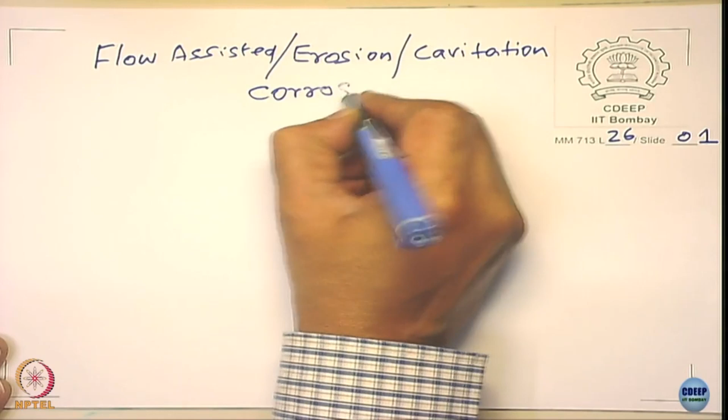Now as I told you, there can be a relative movement of environment. Please notice that when you say the environment, we talk about not a benign one, it is a corrosive environment.

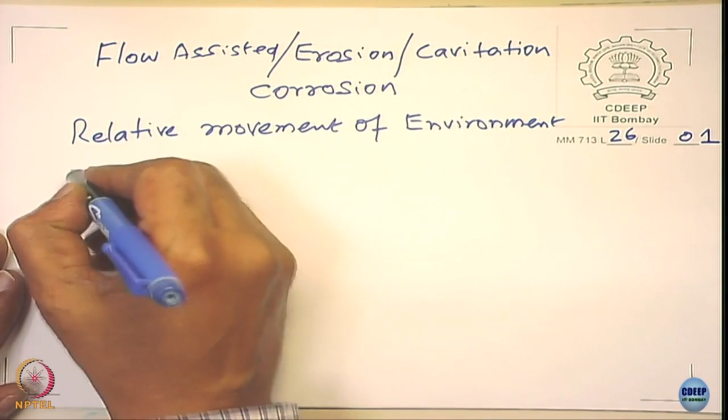Now let us try to understand what you mean by relative movement first of all. The structures can be static, what happens is the environment moves, I would say.

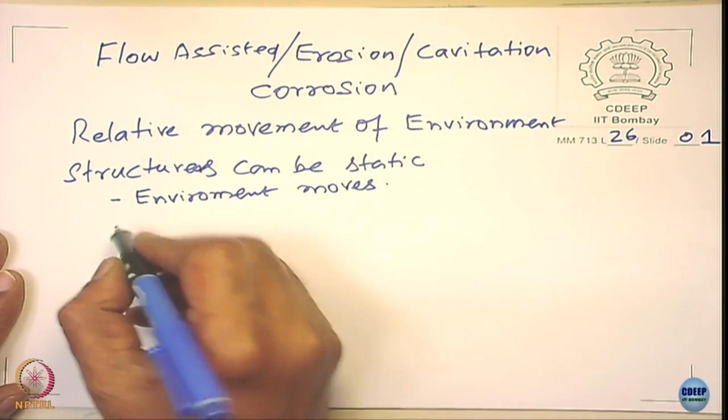An example is a pipeline carrying water, carrying various types of chemicals. Another example could be heat exchangers. The structure is static, the environment moves, maybe at different velocity, different pressure, temperature - all this can happen.

The structure moves. Can you give an example? Anybody? You can say ship, but the velocity is not okay. You can say ship. You can talk about an aircraft also, spacecraft. Sure. In fact, the aircraft moves at a very high speed.

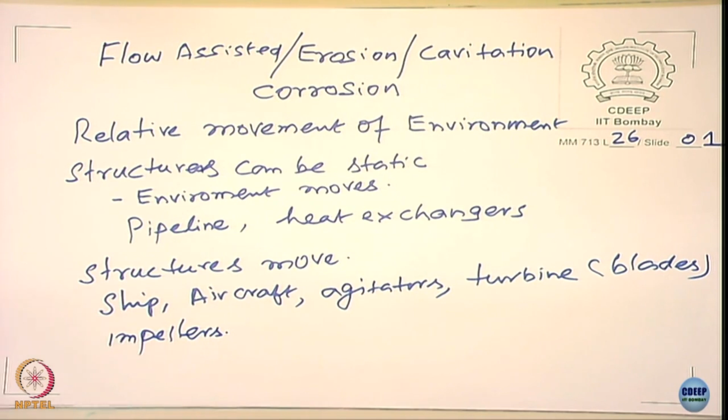Other examples, industrially, agitators, right? In a turbine, right? A turbine, the blades. It could be a gas turbine or it could be a hydraulic turbine, a gas engine. Anything else? Impellers, they move. Propellers, they move. So these are about the two types of structures I would like to say.

Now, let us look at the environment. What is meant by the environment here? Of course, we will talk about the fluids. At least one has to be a fluid. I mean, corrosive environment is a fluid.

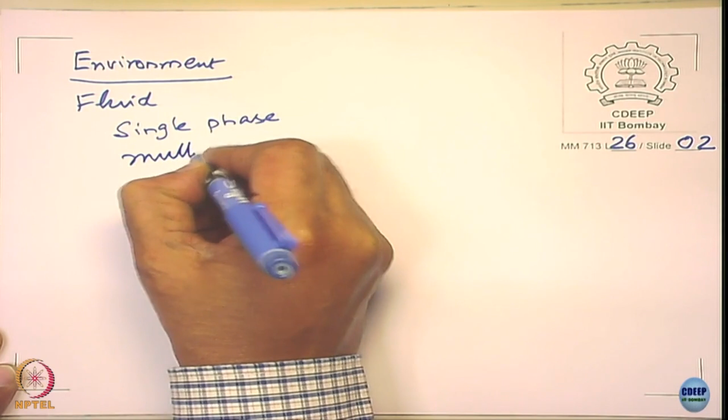It could be a single phase or it could be multi-phase. Generally, two phases can happen commonly, right? Let us say simply water, sea water. An example, this is sea water plus some sand, right?

This can happen. In a thermal power plant, for example, you talk about the steam generators, you may have a gas, steam, you may have water. In a gas turbine, there can be corrosive gases, there can be particles.

So when you say fluid, it is not necessarily a liquid, okay. It can be corrosive gases, it can be liquid, but the solid is not necessarily corrosive. In most cases, you do not even consider them as corrosive. Their role is to give an impact. We will see this later, how they can really affect the corrosion of structures.

If you look at the fluid conditions, when the fluid moves, how the corrosion rate of the metallic structure can change with respect to the velocity. We have seen somewhere, right, the role of velocity on corrosion rate. We have seen this before.

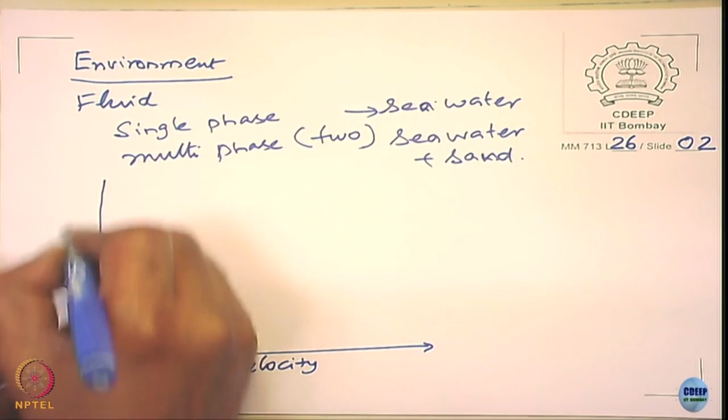Can anybody recollect? Yeah, we talk about concentration polarization, right? When there is a concentration polarization, when you increase the velocity, the corrosion rate increases. It is simply a diffusion control process actually there. If there is no diffusion control process, the velocity does not play any significant role.

You can go back and see the first part of the course on thermodynamics and kinetics of electrochemical corrosion. If you plot this, something like that, the corrosion rate initially increases gradually like that, a steep increase in corrosion, then again it slopes off like this.

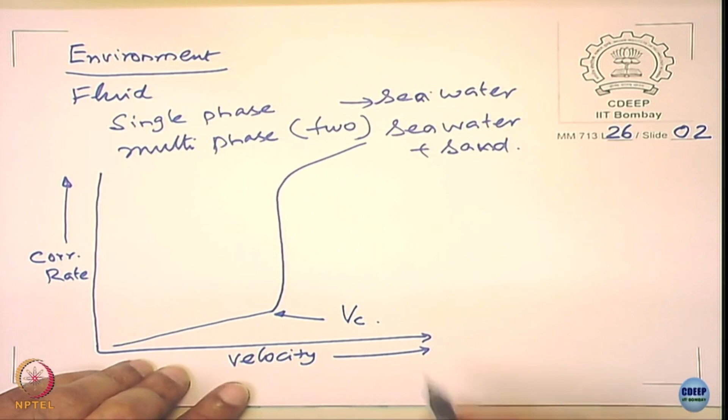That is, you see here there is a velocity called a critical velocity, above which the rate of corrosion steeply increases with velocity, right.

When you visualize, let us say a pipeline, suppose visualize it, and if the fluid travels in the pipeline, if the movement of the fluid is parallel to the surface, what do you call that? We call a laminar flow.

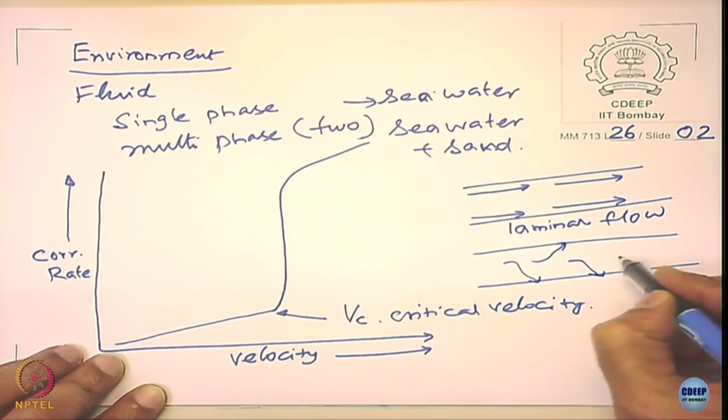If the flow rate is increased, what happens now? It is no more parallel to the surface, it is going to hit the surface. Okay, what do you call this?

Now the laminar flow, turbulent flow, they all depend - this is described by Reynolds number and there are equations we will not get into here. But it is enough to understand that the nature of flow decides the kind of corrosion that can happen. Laminar flow or turbulent flow depends on velocity, density, the dimensions of the pipeline, and so many other factors.

So the rate and nature of corrosion here is different from there. You can divide this - this is going to be turbulent, and this is going to be laminar.

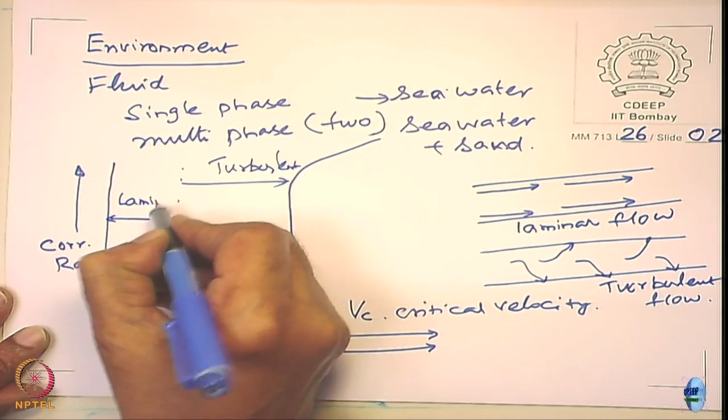And for a major part of the laminar flow, we can say that the corrosion rate can be controlled by diffusion processes - essentially corrosion is diffusion controlled. Some of you would have studied this, if you can recollect - if it is a cathodic reaction, it is diffusion control.

This is called IL, and as the velocity increases - we talked about this in the first part of the class - it is a diffusion control process, and the corrosion can be assisted, and the mass transport is important. You will see later how the corrosion can get affected.

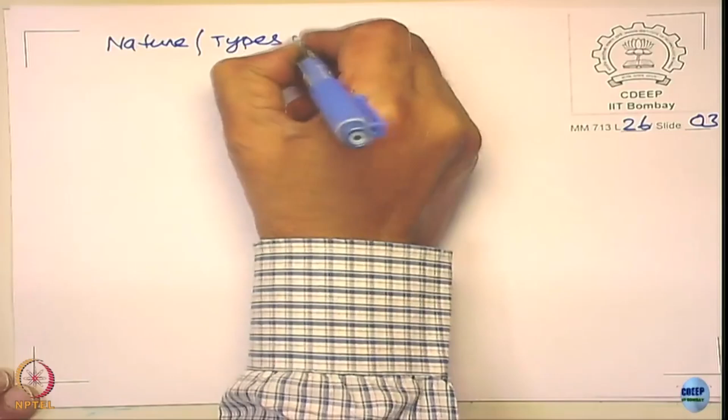Now, depending upon the kind of flow conditions that exist in a pipeline, the types of corrosion can be broadly classified into 3 types. I call these the types of corrosion which are induced by the flow.

One is called flow induced corrosion. This is essentially related to an increase in mass transfer - mass transfer of the corrosion product, how quickly it can get removed from the surface.

Earlier we talked about the diffusion control process - in that case, what is diffusion controlled there? If you remember, when we said here, what was the mass transfer control? It is the cathodic species that is mass transfer control. We will see here that in this case it is not necessarily the cathodic, reduction species that is mass transfer control - it is the oxidized species which are mass transfer control.

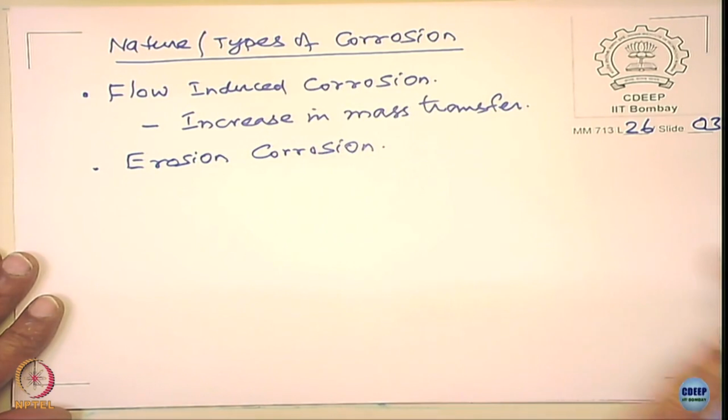I will just talk about that soon. Next is erosion corrosion. Here it is mechanical damage, mostly of surface films.

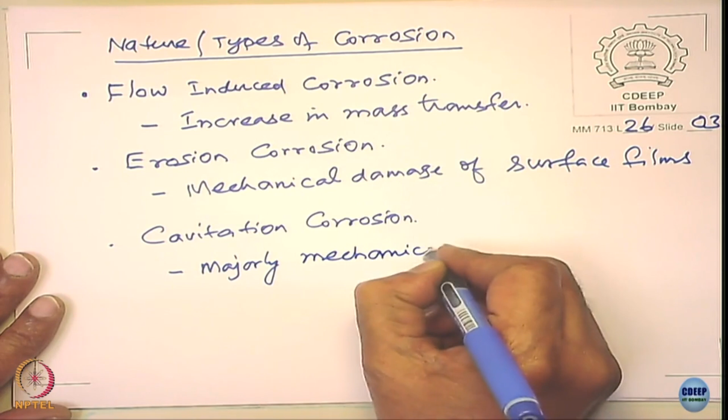So there is an impact, there is real erosion taking place, in the sense of a mechanical factor. The other one is cavitation corrosion - it is majorly mechanical, and corrosion, if I can say, is minor, in quotes.

Now we have classified the corrosion occurring on a metal into 3 different categories, primarily because the mechanism of corrosion in all these cases is different. When the mechanisms are different, the solutions are going to be different, so we are not going to apply the same solution in all cases. Of course there can be an overlap of properties and protective measures, but distinctly they are different, you can see that.

So now let us look at the first type, the flow assisted corrosion - flow induced or flow assisted, you can call it either way. What is this flow induced or flow assisted corrosion? What does it do?

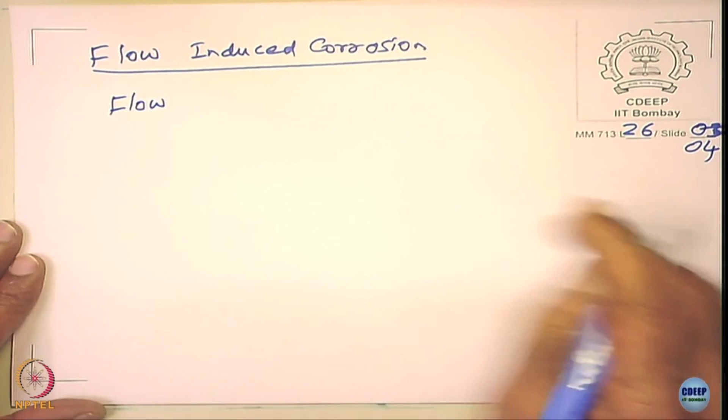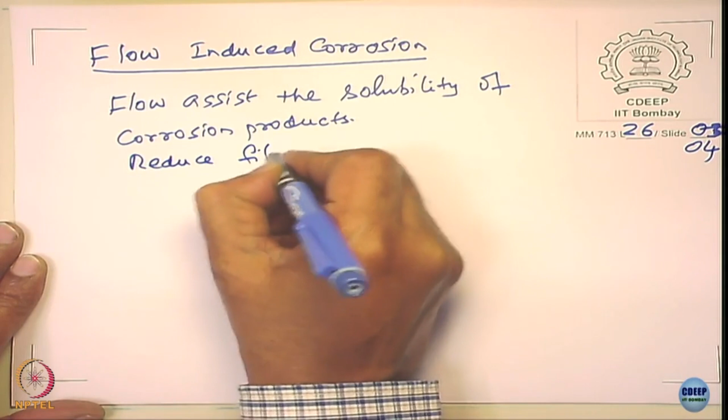What it does is that the flow that happens in the system, mostly in the pipelines, assists the solubility of corrosion products, then reduces film formation, and so it can enhance corrosion.

It can happen in single or two-phase conditions - two-phase flow, I would say. Let me try to explain what we mean by all these factors here.

The flow assisted corrosion problem was first found in thermal power plants. They made a survey in 1997 of 63 power plants, 63 plants, utilities. In all these cases, they found quite an extensive number of plants suffered flow assisted or flow induced corrosion.

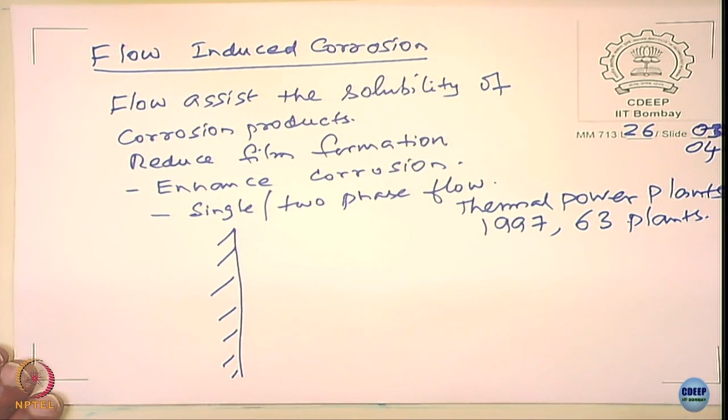The generation of steam means you use pure water. There are certain specifications depending upon the pressure of the boilers - they maintain the pH, purity levels, conductivity, and so on. They normally use steels. How does the corrosion resistance of the steel occur there? Primarily by controlling the pH - when you do that, they form a film on the surface.

See, otherwise you can imagine that in a typical boiler, the steel temperature can be about 250 to 280 degrees Celsius, and in economizers maybe 130, 140. The temperature of the steel tubes are in this range, and you use water, and it will undergo corrosion, right.

You know very well, you have a lot of steel structures here. When rain comes, you see a flash rust - just a couple of hours and you see it all turning reddish brown. How is it possible for the steel to resist corrosion here? By controlling the environment - that means you change into an alkaline pH, and film formation becomes a dominant mechanism of corrosion prevention of steel.

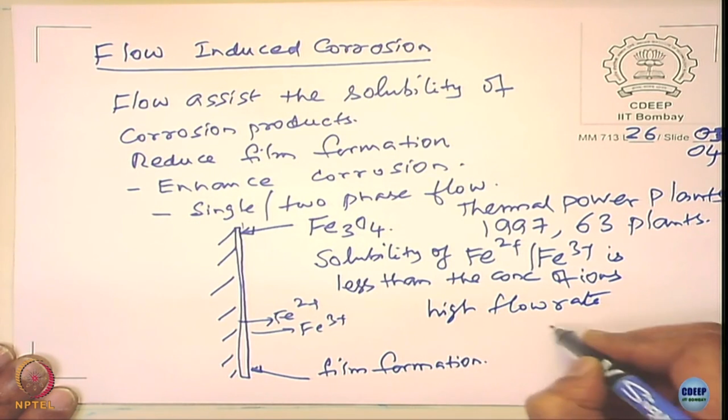Now if I have a flow, what happens? They sweep away these ions from the surface. These ions are not going to get enriched, and so the film formation becomes very low, right. So high velocity, high flow rate means low concentration of Fe2 plus and Fe3 plus taking place. That means the metals start dissolving more and more as you increase the velocities.

So here that is what it means - the velocity increases the dissolution process by sweeping away the corrosion products, that means the film formation becomes very low in that case. So that is the primary mechanism of corrosion of steel by flow induced corrosion process.

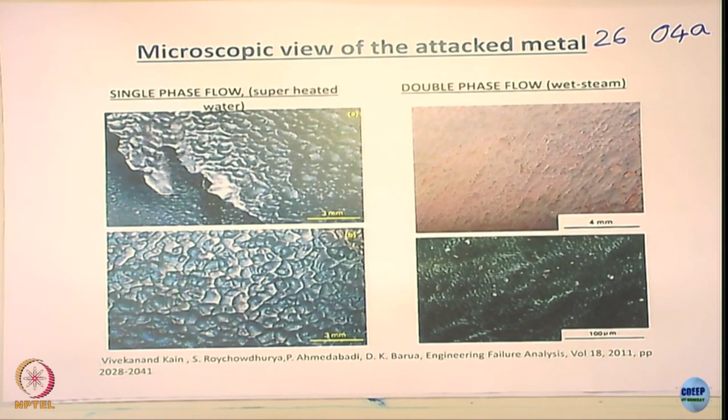How do they appear? These are photographs taken on a steel pipeline with superheated water. You see the left side has got a single phase flow here, the two phase flow. You can see that the surface is quite rough, because of the dissolution process the surface becomes rough - they are dissolved in water.

Here it is, they call it tiger stripes - it looks like a tiger stripe appearance, so they named it tiger stripes. Please understand these are not at very high magnification, they are lower magnification, they are not microstructures. So this is the kind of appearance of the surface affected by flow assisted or flow induced corrosion process.

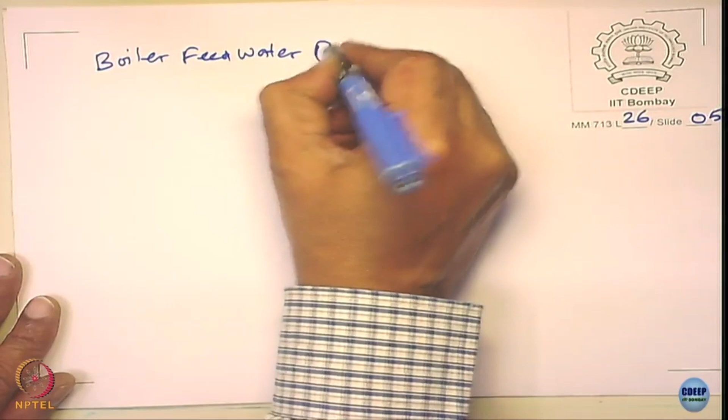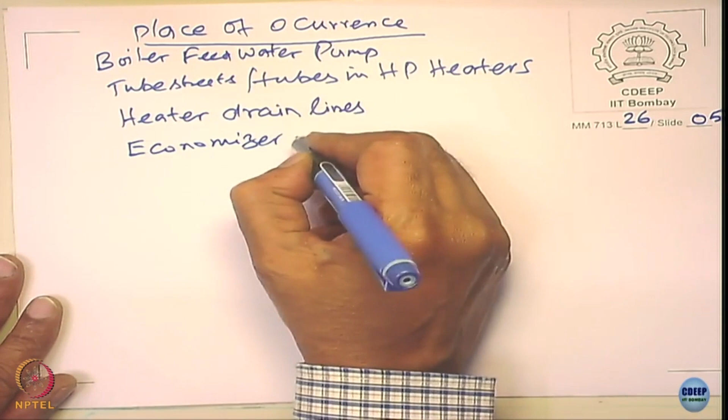Now these are very important - it occurs in power plants in several places: boiler, feed water pump, as a place of occurrence. Feed water pump, tube sheets, tubes in HP heaters, heater drain lines, economizer inlet tubings, piping to economizer heads, deaerator shell. Now there are several places.

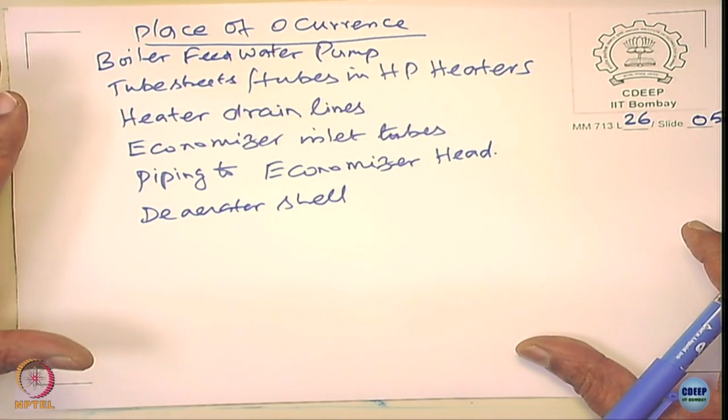I think I just give some illustration that they are important for thermal power plant. Of course it can happen for nuclear power plant as well, right. So you have seen now the mechanism of flow assisted corrosion, we have seen the importance of the flow assisted corrosion. Now let us look at what are the factors that affect the flow assisted corrosion.

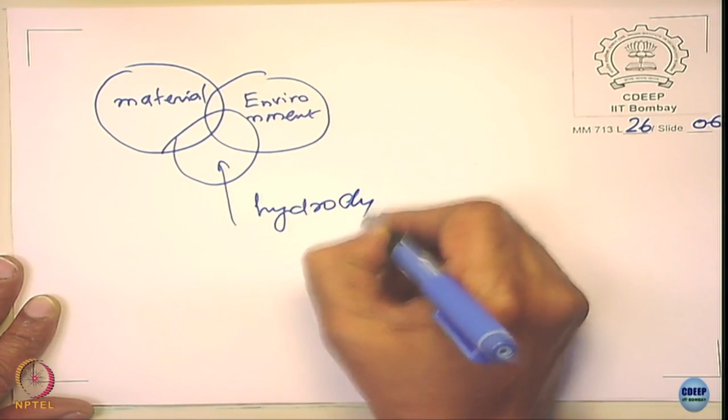Obviously you always have a material component, right, you have the environment conditions, then you have what is called hydrodynamic conditions. So people have modeled this actually - in fact this is one of the serious problems in nuclear power plants. They have modeled this flow assisted corrosion. The factors involved are material, the environment, and the hydrodynamic conditions existing in a flowing system.

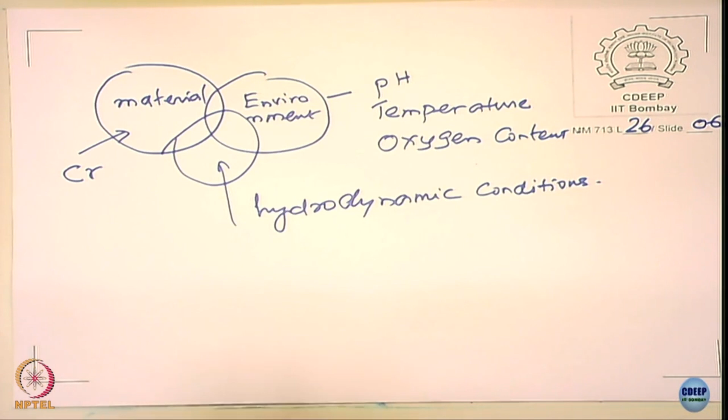Now in the materials, mostly people talk about the chromium content. Later, the environment - we have the pH, temperature, the oxygen content. And the hydrodynamic condition means it is all related to mass transfer coefficient, right, how the mass is being shifted from the surface to solution. So there are going to be complex parameters.

So if you look at this, it is very interesting now. In a pipeline, the hydrodynamic conditions might change depending upon what? Depending upon the diameter, the velocity, the shape - for example it is a U bend or maybe it is an elbow. These locations are severely affected by this flow assisted corrosion, but these are straightforward pH, temperature and oxygen content, and increase in chromium content is supposed to be better from the resistance point of view.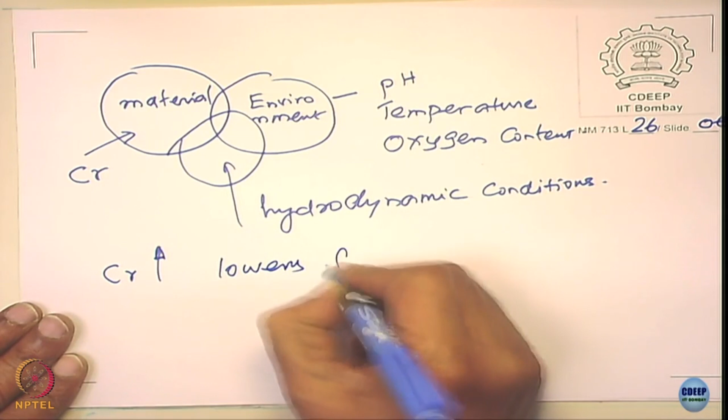Chromium - increase in chromium lowers flow assisted corrosion. And I say that if it is more than 1 weight% chromium, there will be no flow assisted corrosion. I do not say no, I would say significantly lower.

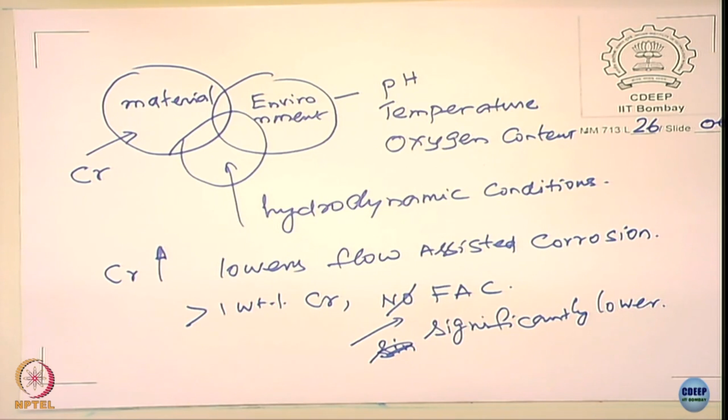It does not occur in stainless steel, and stainless steels are not used very extensively because they are expensive materials. So in economizers, many of the units we discussed here, they are not made up of stainless steels. Earlier they were made of simply carbon steel. Now people go for chrome steels, 1 chromium or even 2, 2 and a quarter chromium kind of, but 1 chromium is quite common.

Materials now people use in order to prevent the flow assisted corrosion of metals. How does 1% chromium work? Yeah, it's a good question. Just give me some time, we'll discuss now. You'll see how this 1% chromium is sufficient enough to form a stable oxide on the surface.

Let's look at the environment now. First, the temperature. And the velocity. These two are very critical. So plot temperature versus the corrosion rate. You will find like this. And very interestingly, in this temperature range, these are different velocities, V1, V2, V3 and V4.

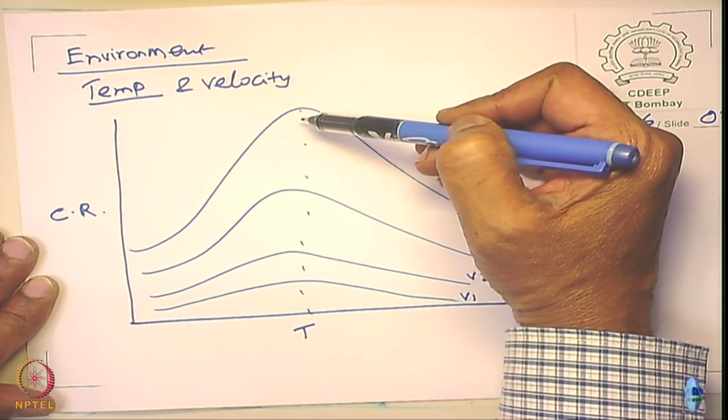V1 smaller than V2, smaller than V3, smaller than V4. When the velocity increases, the flow assisted corrosion increases, but notice here it increases steeply at this temperature. With temperature it rises and then there is a drop in the corrosion rate. So it is a very unusual thing that you notice for any corrosion process.

It is not same as we discussed earlier. Remember earlier we discussed the effect of temperature on the corrosion rate of water, I said that when you raise the temperature above 85 or so, the corrosion rate of water drops because the oxygen escapes from the surface, from the water. In a boiler that does not happen, the oxygen cannot escape, nor is oxygen present in this water at all. So what happens is that essentially if you raise the temperature...

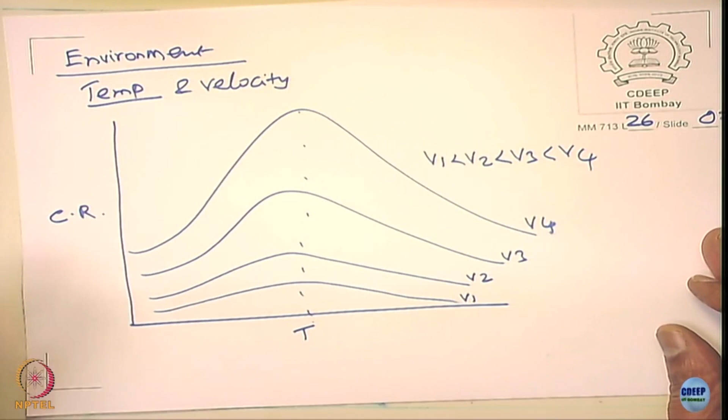What happens to solubility? In some cases the solubility increases, in some cases the solubility decreases. What do you call the solubility? Have you heard of this? Retrogressive solubility. So the metal starts precipitating after certain temperatures. So when you raise the temperature, the ability of the system to precipitate, to form protective film, increases.

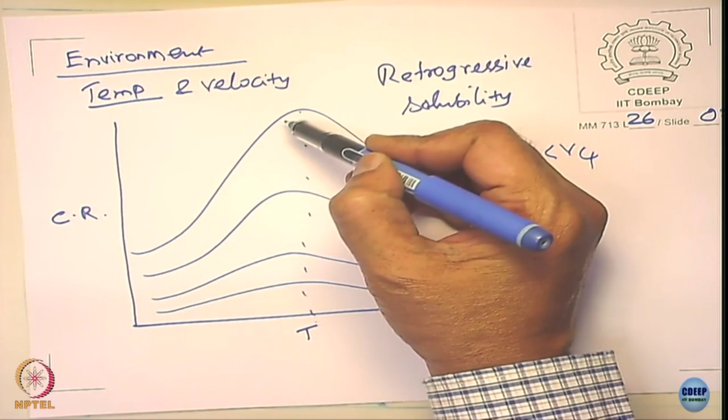So rising temperature increases the kinetics of metal dissolution. Assume that there is no film on the surface, the rise in temperature will only lead to increase in the corrosion rate, am I right? Assume no film is formed, and if you raise only the temperature, the corrosion rate will only increase with temperature. But there are two factors: the rise in temperature increases the corrosion rate, but the rise in temperature also increases the scale forming tendency. So the corrosion rate starts falling like this.

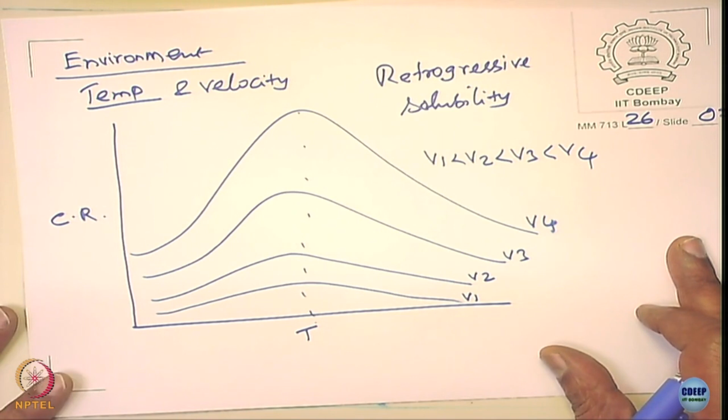So you have an optimum value here wherein the corrosion rate is highest and then it starts falling. This is typical of what you find in thermal power plants, they are operating for the utilities actually. And this temperature is in the range of 129 to 149 degrees Celsius for single phase flow, and it is in the range of 149 to 199 degrees Celsius for two phase flow.

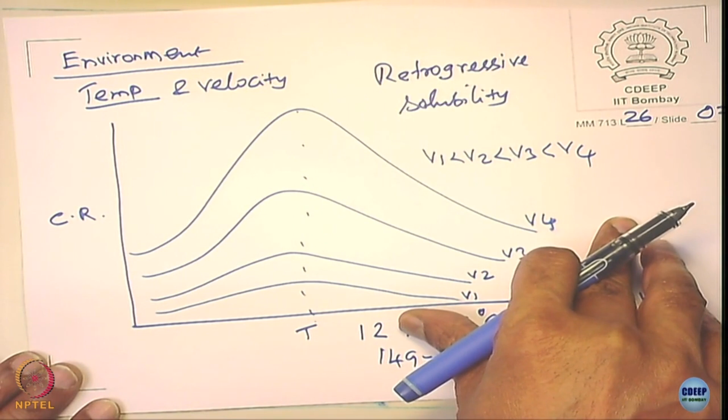So what are the factors that then can control flow assisted corrosion? Velocity, the temperature, right, the pH. Now all of them should be seen in the light of the ability to form an oxide film or to damage the oxide film. Please look at that. So those factors which assist the formation of the film will lower the flow assisted corrosion, and those factors which dissolve the film will increase the flow assisted corrosion.

So you do not need chromium to form a passive film in steel. How is the film formed? The film is formed by maintaining the pH. The pH is a primary thing for that. So the role of chromium is just to assist the film formation. It is not going to be a pure chromium rich passive film that you see in stainless steels. Here the film will be rich in iron oxide, Fe3O4, but the chromium assists the formation of a stable Fe3O4. So the kind of film formed here is not the same as the kind of film formed in stainless steels, the chromium is only assisting it.

If the pH is not properly maintained, I do not think that chromium will be sufficient to form any film at all. So that is the point of view, and the 1% chromium is good. Of course, you increase the chromium content, it is even better, but of course the cost increases. In industry, every penny is important. You do not want to keep increasing the MOC to better materials, because that is going to cost more.

Now, what else can improve the film formation? Interestingly, is the role of dissolved oxygen.

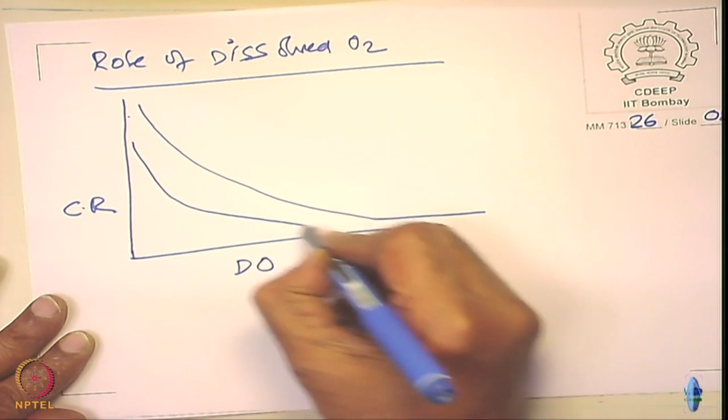This is called a polished surface, this is pre-filmed. Please notice that generally the boilers are passivated - there is a treatment called passivation treatment people do, they call it alkali treatment, in order to form the film. If you have a film here, it is even better.

Please notice that the oxygen content helps to decrease corrosion rate. What does oxygen do? It increases the corrosion rate, no doubt, but if it increases beyond a certain level, it enriches the metallic ions on the surface and forms a film. It is very similar to critical current density - when you reach the critical current density, you have more metallic ions, then the passive film starts forming. So you need a critical amount of metal ion concentration on the surface to form the protective oxide film.

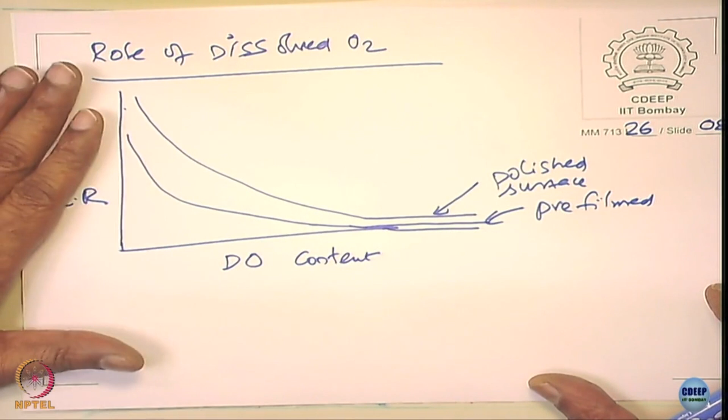This means it is very interesting here - the corrosion control in this case is done by injecting some oxygen content in the boilers, and it's about 50 ppb. Please look, it is not ppm level, this is 50 ppb level.

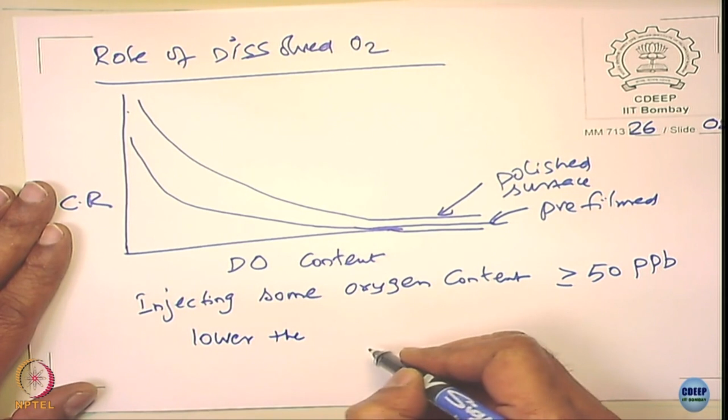So they lower the flow assisted corrosion. We will not get into discussion of the mechanism of that - there are a lot of papers available, those who are interested can read. Please notice, this water treatment is not common for all the boilers. The normal boilers we talk about do not use this, but now we use boilers such as - you might be aware of this - supercritical boilers.

They give this treatment, called oxygenated treatment, in order to reduce the flow assisted corrosion.

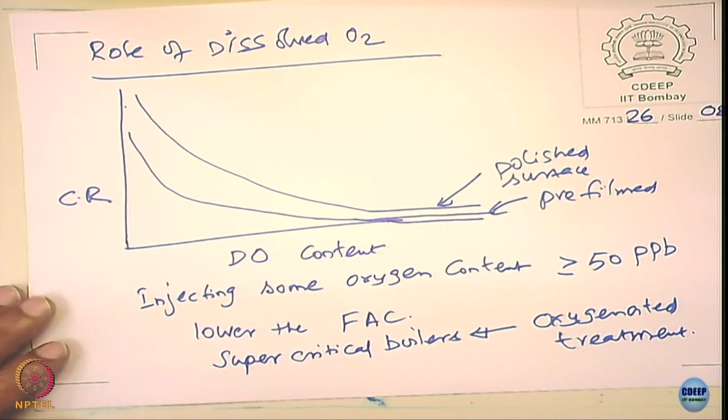So let me summarize what we have seen so far, so that you have some clarity. You have flow assisted corrosion. What are the factors that affect it? It is the material, the environment involved, and of course the flow conditions or hydrodynamic conditions.

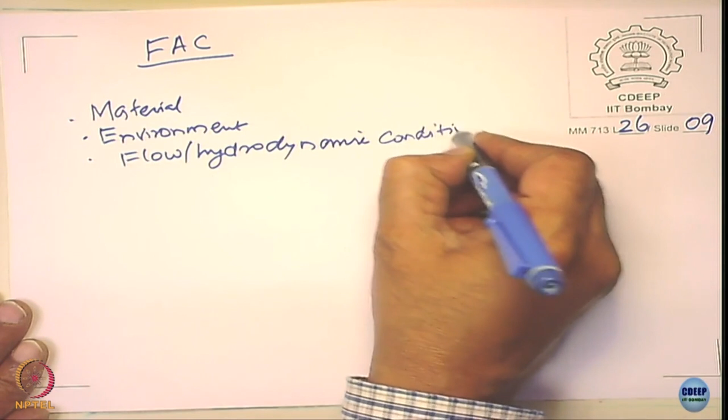The mechanism here is - what does the flow assist? Simply the electrochemical dissolution process. Notice, no mechanical damage. It is simply that the flow conditions help to sweep away the corrosion products, and so the corrosion is increasing. They do not allow the film formation, or they lower the film formation on the surface.

How do you control this? Control measures: chromium alloyed steel used, maintaining the optimum pH.

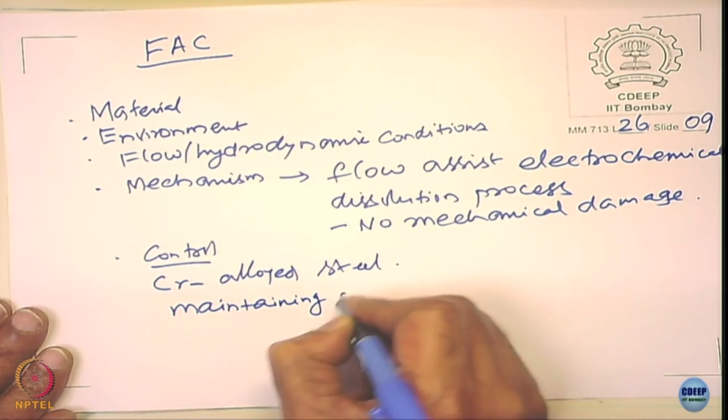Very important thing, the design, right? Why design? The hydrodynamic conditions existing on the surface depend upon flow conditions. It could change - if you have sharp bends, you get more flow assisted corrosion. If you avoid that, it may reduce. If you reduce the velocity, then the flow assisted corrosion would decrease. So the design of the system is equally important.

And of course the corrosion allowance - you do not want that as the primary way of preventing it, but we are not going to totally eliminate flow assisted corrosion. So incorporate the flow assisted corrosion rates in the design, especially in a unit - some places like inlets, bends, elbows - you should incorporate the corrosion allowance to lower the flow assisted corrosion.

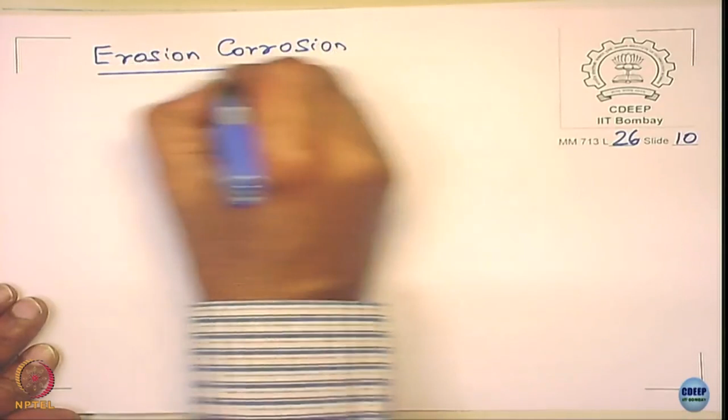Move on to the next topic, which is erosion corrosion. Let us straight away bring out the difference between erosion corrosion and flow assisted corrosion.

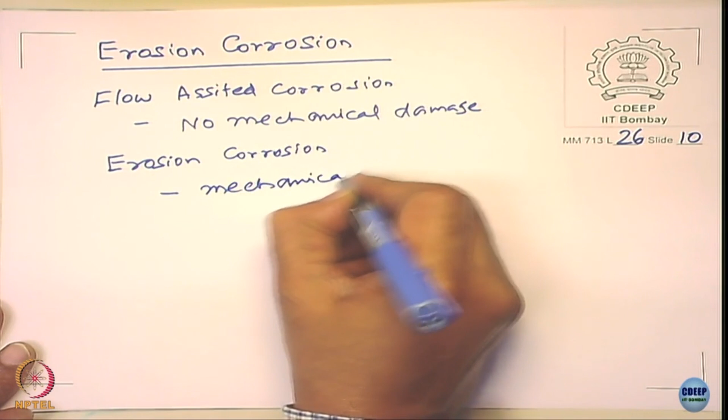Here, no mechanical damage - right, in the flow assisted corrosion. In erosion corrosion, mechanical damage is predominant. It happens very widely across several industries. The flow assisted corrosion is mainly related to power plants, either nuclear or fossil fired boiler power plants.

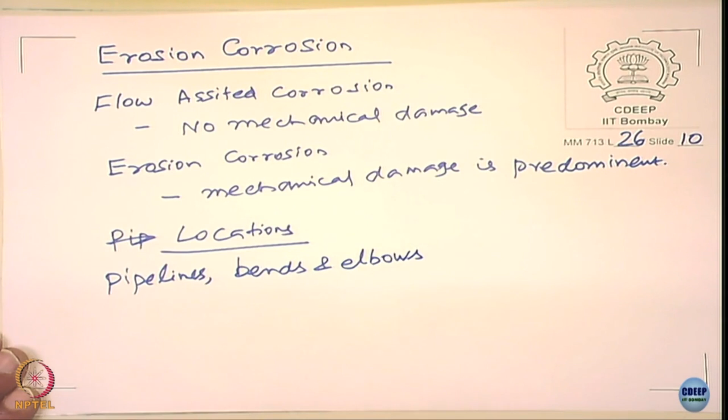So the locations where you see erosion corrosion are the pipelines, especially on the bends and elbows. You can see them in the heat exchangers, especially in the inlets. You see them in the reaction vessels.

You will see it in agitators, grinders for example - in the mining industry grinding is very common, and sometimes the ore is transported as a slurry along pipelines. So you see huge amounts of erosion corrosion taking place in the pipelines.

Again, you will see impellers, gas turbines and hydraulic turbines, nozzles - they are all quite common examples of erosion corrosion taking place.

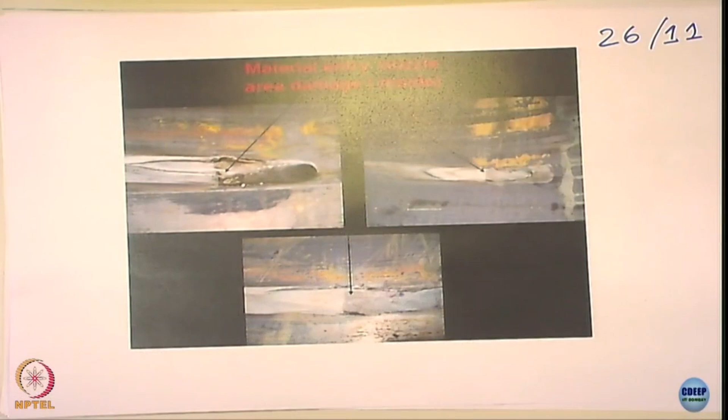It is an example of erosion corrosion - please do not use the term flow assisted corrosion here, it is erosion corrosion. What you see is a reactor vessel - reactor vessel is a wall, actually a wall. Actually there is a reactor, there is the inlet here, this is the inlet, and this is actually the sulfuric acid.

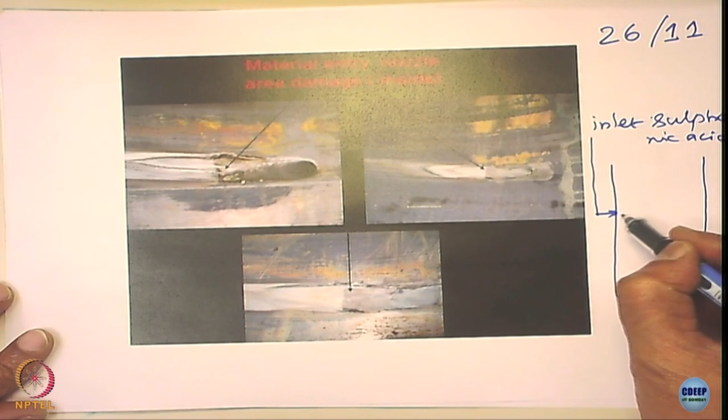So this reaction vessel here is a kind of autoclave, or reactor. Through this the sulfuric acid is pumped. This is the surface of the reactor, and the sulfuric acid travels like this, okay.

You can see the marking here, severe corrosion taking place, right. Next to that there is not much corrosion for two reasons: one is the velocity, and the second is that the sulfuric acid gets diluted, so the corrosion rate also comes down.

So you can also see some kind of flow patterns. Are you able to see this here? I hope you are able to see this flow pattern, right.

These are all having specific features to show that there is a certain amount of uniqueness in the way the metal gets damaged. They call it fingerprints, okay.

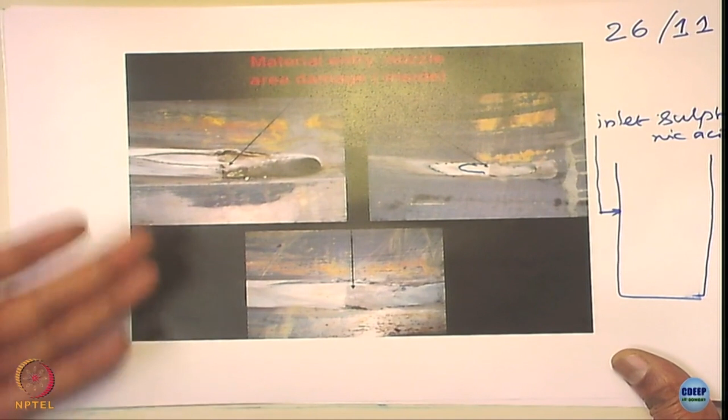This reactor did not even last for about 6 months. Within 6 months, the reactor starts leaking. Yes.

This earlier one was a stainless steel. What you see here is not a carbon steel, it's a stainless steel.

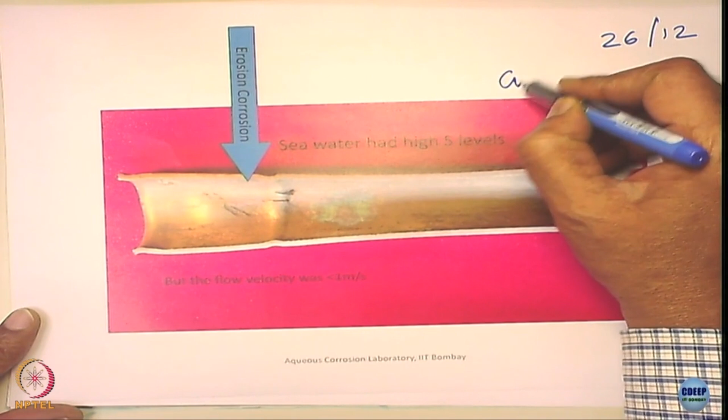This one is a copper nickel alloy. It is copper with 10% nickel, and this is a tube for a heat exchanger.

In the tube the seawater was flowing. Look at this, the velocity was hardly about 1 meter per second. The external, on the shell side, the process fluid is essentially hydrocarbon. You do not see any corrosion on the shell side.

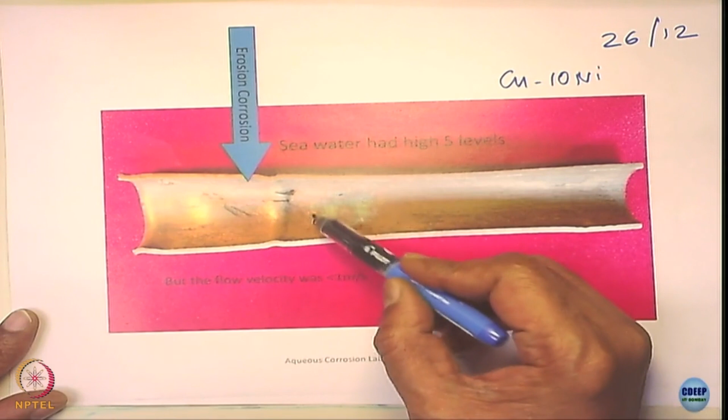I hope you can see the marks here, right? You see the marks here, okay, and I hope you can also see some marks here. This is an inlet, the inlet of a heat exchanger.

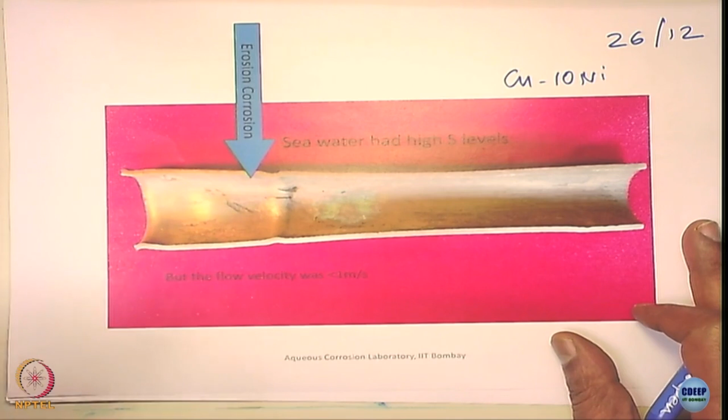So very interesting, and there are several tubes in the heat exchanger. Within about a few months of commissioning, some tubes started leaking.

It was in a refinery located in Mumbai. So they changed the tubes. Within another month, the heat exchanger started leaking again, and they again changed the tubes. Almost every month they had to shut down the plant.

See, when you shut down the plant, because this is a critical heat exchanger, if it does not operate, then the whole refinery has to shut down. If you shut down the refinery for a day, it runs into crores of rupees, not just lakhs. The material is not very expensive compared to the production loss.

See this. They were using seawater, and with seawater, stainless steel will have some problems like pitting corrosion or crevice corrosion. Copper nickel alloy is supposed to be good because they do not pit, and copper nickel is certainly better from the point of view of de-alloying as compared to brass.

We have seen it, you saw yesterday, right. A little bit of discoloration, you can see this little green color that has happened because of the nickel dissolution process.

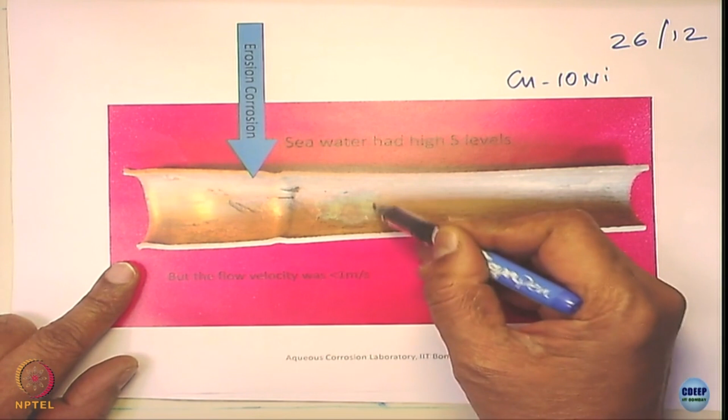But nevertheless, 1 meter per second is hardly a velocity, and it's failing so frequently. So that was one of the problems. We will probably see what could be the problem in subsequent discussion. When we start analyzing erosion corrosion, we will come back to this problem and see what was the real reason for the erosion corrosion of this particular heat exchanger.

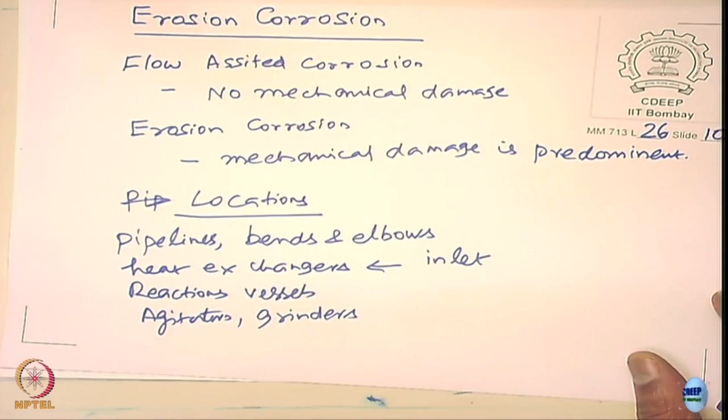Now, what I was trying to say was the inlet of heat exchangers generally undergoes erosion corrosion. In fact, that is termed as inlet corrosion. So when there is turbulence, it mechanically damages and removes material, okay. But then what is the difference between erosion and erosion corrosion?

So I give an example. Suppose there is a pipeline and you are passing nitrogen gas through it, and maybe there are certain solid particles, and the tube gets damaged. So it is purely erosion damage. You put a bit of moisture in the system, so the gas is no more dry, the solid particles are no more dry, you just have some water. Now it becomes erosion corrosion.

Why? Because you have a corrosion component coming in. So erosion corrosion is a conjoint action of the mechanical erosion factor assisted by the corrosion factor. So when you talk about erosion corrosion, we look at the mechanical property of the material as well as the corrosion property of the materials, okay. So that makes a difference.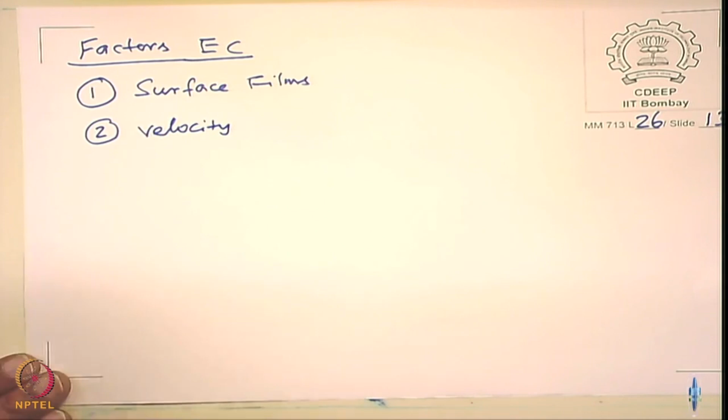So what are the factors controlling or affecting erosion corrosion? Here also we talk about the surface films, they are important. We also talk about velocity, impingement, turbulence, etc. They are related to the physical state of the environment.

They are not talking about the chemical state of it, right? We are not talking about the pH or corrosiveness of it. It is the physical state of the environment, okay.

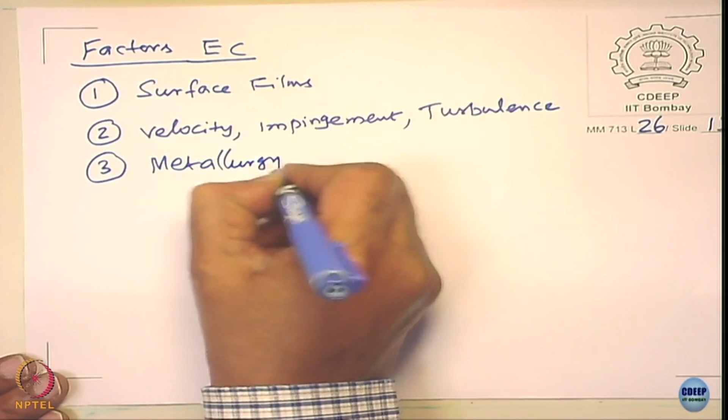The metallurgy of the alloy will also decide the surface films; it is not necessarily that they are independent. But metallurgy here we generally mean in terms of the other mechanical properties such as hardness, toughness, and all kinds of stuff.

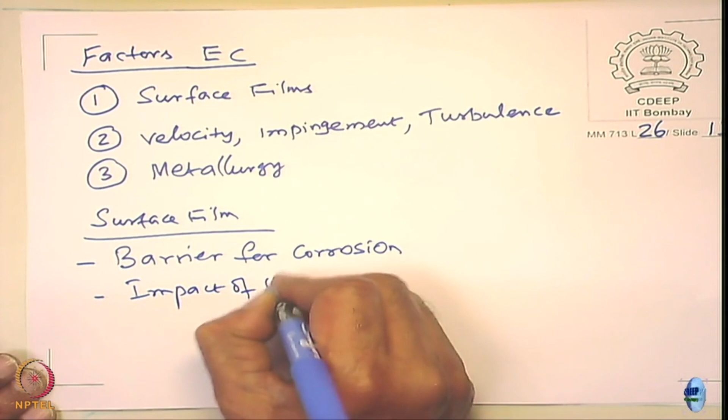So let us look at the surface films. Let us take the first one. Please notice the film offers a barrier for corrosion, it also takes the impact of the environment.

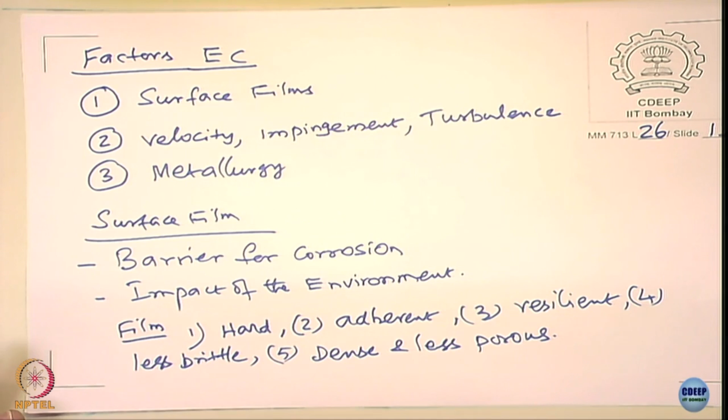So what should be the property or properties of the film which can provide better erosion-corrosion resistance? What are the properties? The film should be, one, hard. Then it should be adherent. Also, it should be resilient, or more explicitly, less brittle. What more? It should be dense and less porous. So those alloying elements added to the alloy that can promote all these properties will ensure that the alloy has better resistance against erosion-corrosion problems. So these are the important things, the guiding factors for alloy development also.

Please notice, it is not necessarily a very thick film; sometimes thick films can be a problem. A thick film—generally the oxide films are brittle compared to the metal. When the film becomes thicker and thicker, what happens to the resilience? It becomes very bad. When the film is thin, it is more resilient against any kind of elastic deformation. And in erosion corrosion you are not going to get into too high impact—in cavitation it does happen. So you are talking about resilience within the elastic limit; most of the deformation would occur in erosion corrosion.

Let us look at some examples of how surface film formation happens. The surface film formation would also depend upon the nature of the environment, not just the metal alone. Suppose I take a stainless steel in a reducing environment—what happens to the film-forming tendency of a stainless steel? It decreases, because you need oxidizing conditions.

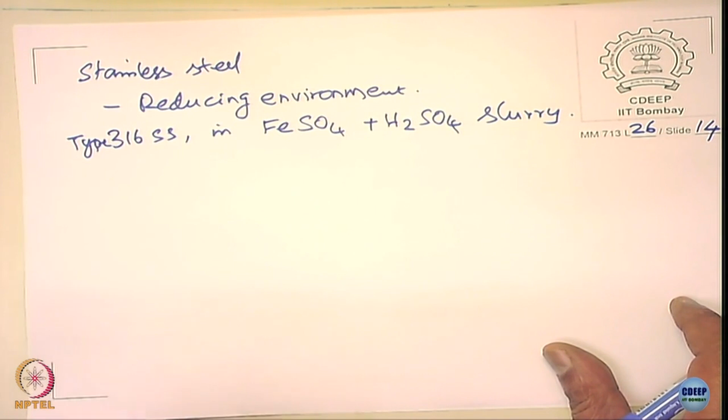That could be seen very well in the case of, let us say, type 316 stainless steels, corrosion in ferrous sulfate plus sulfuric acid slurry. Please notice ferrous sulfate is a reducing condition, not oxidizing; ferric sulfate is the oxidizing condition. If you use 316 stainless steel and look at the corrosion rate with respect to temperature, the corrosion rate is somewhere about 5000 mpy, something like that.

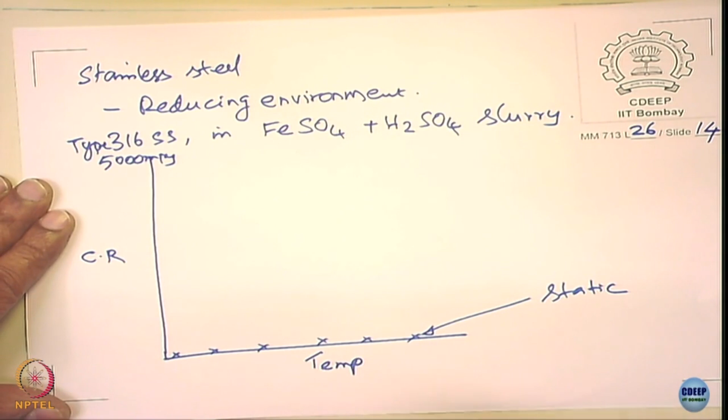In static conditions, this is ferrous sulfate plus sulfuric acid slurry—not a flow condition. Where, if you increase the velocity to about 3 meters per second, the corrosion rate goes very high, and it changes steeply with respect to temperature as well.

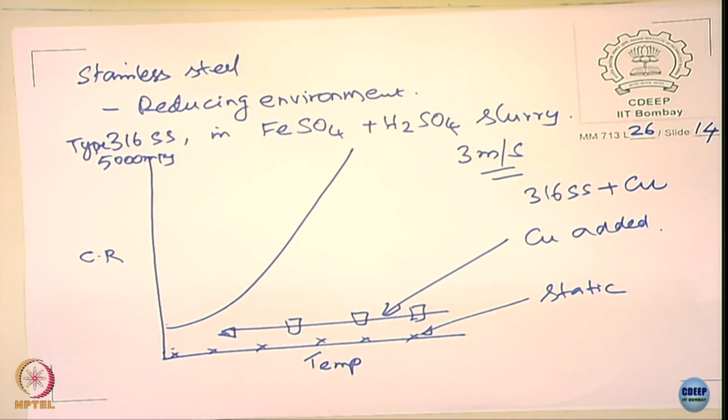But if you add copper to 316 stainless steel, the corrosion rate drops. When you add copper to stainless steel, the film-forming tendency becomes very high. In fact, if you look at material selection for sulfuric acid applications, the stainless steels have copper in them, because copper helps form a stable passive film. So there is a significant drop in the corrosion rate, and these copper additions are only about 1 to 2 weight percent—not a very large amount of copper content.

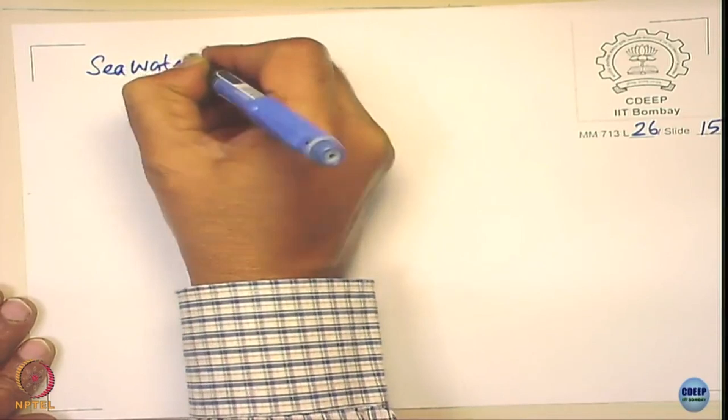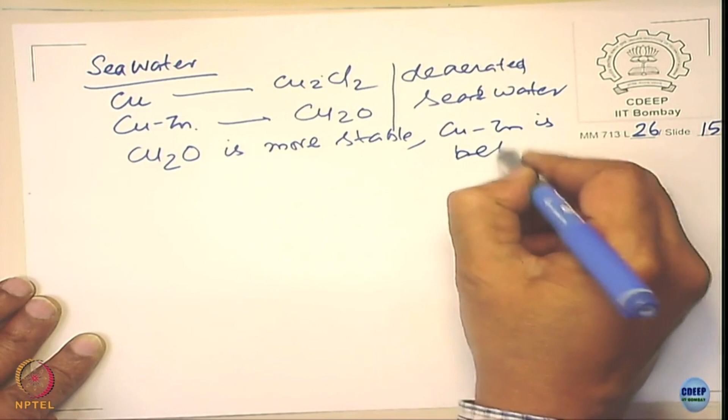Similarly, what people have seen with copper-zinc brass in seawater: the copper forms cuprous chloride, and it forms cuprous oxide in deaerated seawater, and cuprous oxide is more stable. So copper-zinc brass performs better. What we are trying to say is that the nature of the film that forms on the material largely decides the erosion-corrosion resistance of the material.

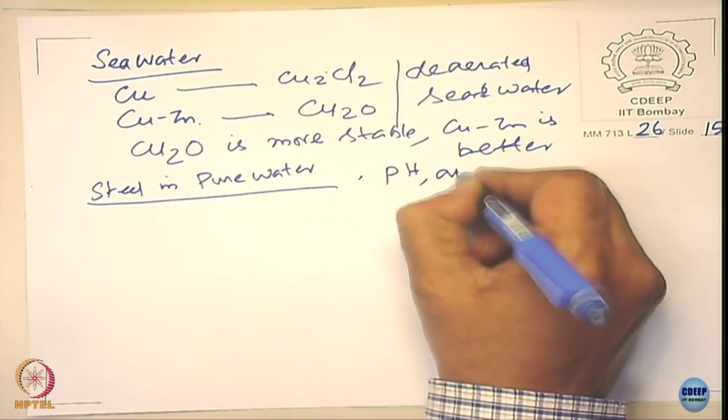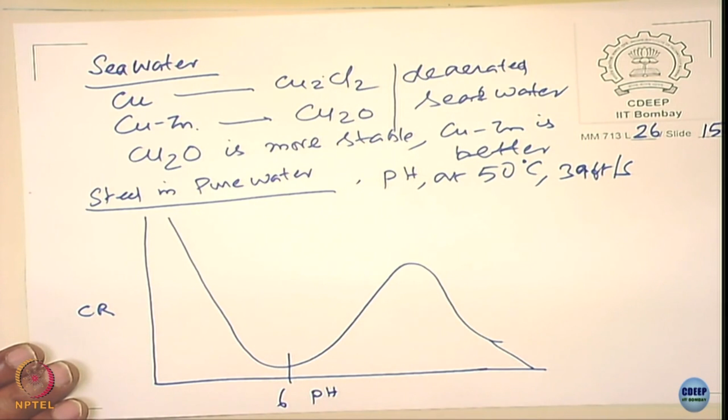The other example is steel in pure water, where they studied the pH at 50 degrees Celsius, with a velocity of about 39 feet per second. Looking at the corrosion rate around pH 6 to about pH 10...

Now, the reduction in corrosion rate in both places is largely related to ferrous hydroxide and ferric hydroxide formation, and granular Fe3O4 oxide formation. Again, there are a lot of internal stresses involved.

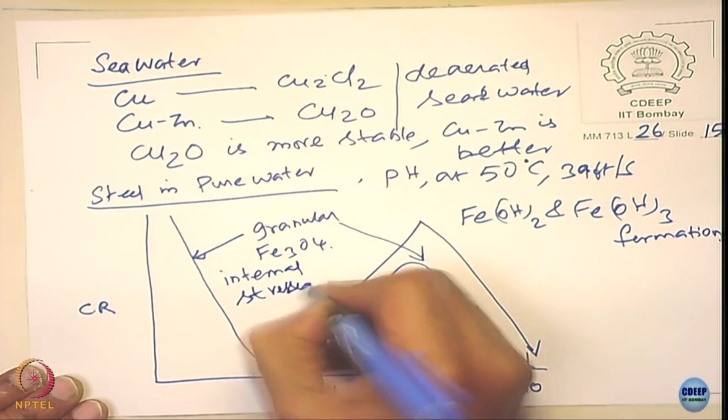So the point we need to emphasize here is that the nature of the oxide forming on the metal surface bears a significant influence on the erosion-corrosion of metals. So let us stop our discussion for the time being.